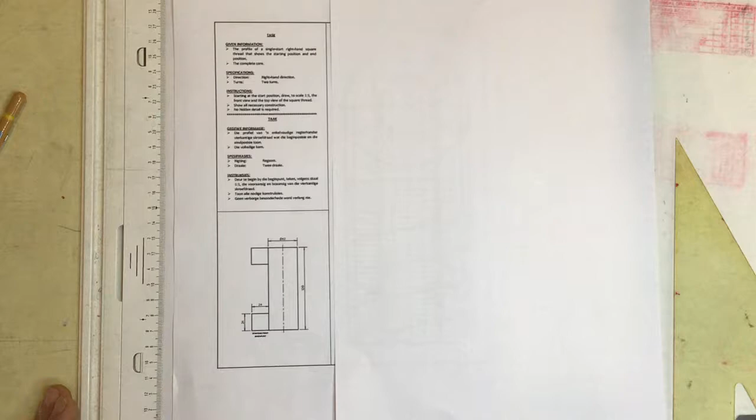Okay, in this video we're going to look at the drawing of a square screw thread. It says that the given information is a profile of a single start right-hand square thread that shows the starting position and the end position. The complete core, they've also shown that. They ask you to do a right-hand direction, and they've asked for 2 turns. Very important, that 2 turn story.

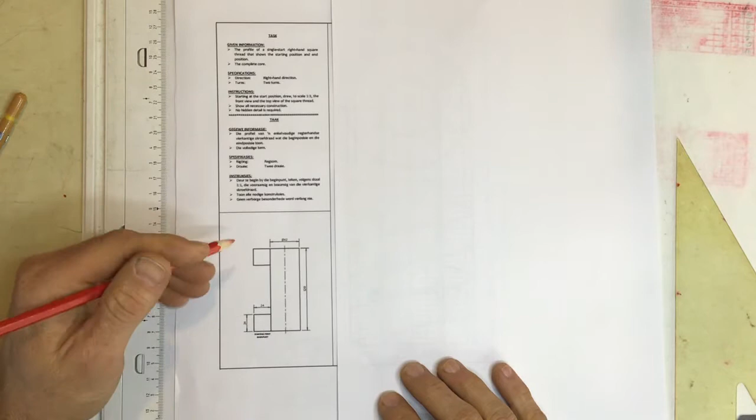They say that the starting point, draw a scale 1:1 and a front view and top view of the square screw thread. Show the necessary construction and no hidden details required. Okay, they've shown the actual profile of the square screw thread, which you shouldn't actually ever be able to see when you're doing these drawings because, well, in real life you'll never really see the square profile of that square screw thread. It always has a starting position.

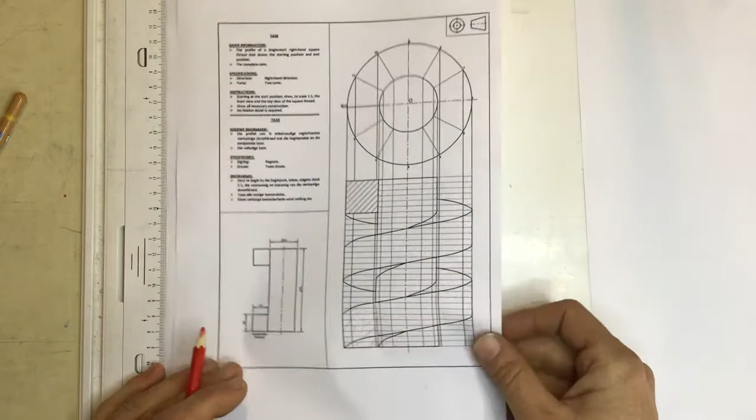I'm going to show you what their answer was. They've actually shown the square profile of the square over there, and they've also shown that, well, if I had hidden detail over here, I'd be able to see a square profile down at the bottom there as well. The answer shouldn't really look like that. Your answer should look more like this, where you can see the start of the screw thread basically being like a wedge, you could say, and the end also being a wedge. And that's more what we're going to aim at with this drawing.

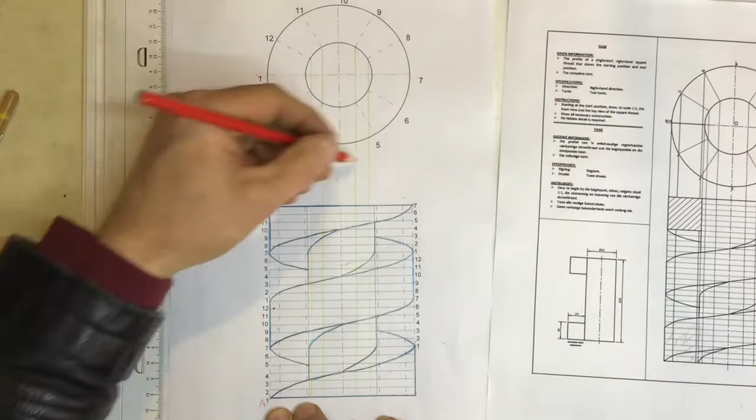Right. They've asked you to do a right-hand direction, okay? And we're going to say that our starting point A is down at the bottom over here. There's starting point A at the bottom and starting at point 1. If my starting point is at the bottom, my numbering is going to go anti-clockwise for a right-hand square screw thread, okay, or right-hand helix, going anti-clockwise if the starting point is at the bottom and it's right-handed.

Okay, let's have a look at the numbering over here. When you're numbering from the bottom over there, remember we said that our start was at the bottom, 1, 2, 3, 4, 5, 6, 7, 8, 9, 10, 11, 12, going back to 1, okay? A lot of the textbooks, they go 0 to 12, and then they have another 0 to 12. I prefer just to start with 1 and end with 1.

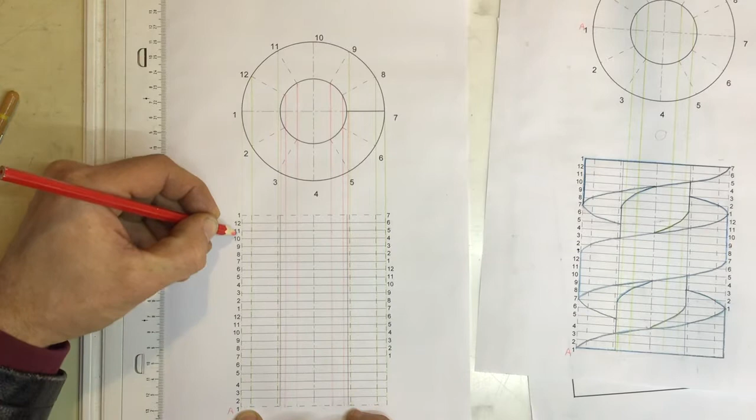So I've still got my 12 spaces, 1 through 12 and back to 1, that's 12 spaces. 2 through 12 and 1, that's still 12 spaces again. Okay, right, let's just have a look and see where we're standing in this.

If I'm looking at a third angle orthographic projection, I'm standing in between the 2 views, which means that I can see these numbers 1, 2, 3, 4, 5, 6, 7, and I'm going to come to my drawing over here and I'm going to draw that number 1, 2, 3, 4, 5, 6, 7. Starting at 1, there's 1 linking up with that 1, there's 2 linking up with 2, there's 3 linking up with 3, and we're just going to continue.

There's 1 to 2, 2 to 3, 3 to 4, 4 to 5, 5 to 6, and 6 to 7. You can see it over there. 1, 2, 3, 4, 5, 6, 7.

Okay. Once I've got that, I'm going to then start with another set of numbers over here. Can you see this number 1 through 12, going back to 1, okay? I'm going to be able to see the top of the next screw thread over here, starting at number 1. There's number 1, linking up with number 1. So 1, linking up with 1, going to 2, 3, 4, 5, 6, and going to 7.

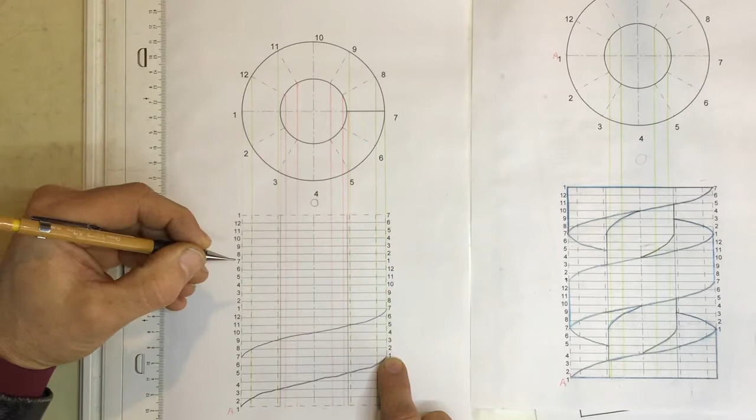Right, once I've got that, well, I come back over here. This is my second turn. Okay, number 1, going to 2, 3, 4, 5, 6, 7. Okay, there's number 1 over there, starting with point number 1. 1 to 2, 2 to 3, 3 to 4, 4 to 5, 5 to 6, and 6 to 7. All right.

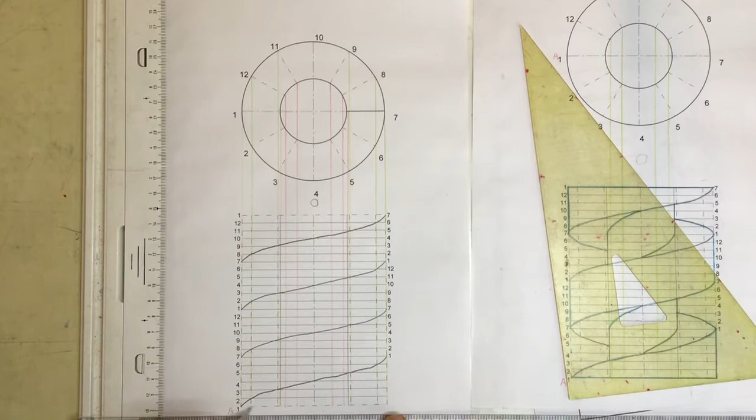Once I've got that, my next step that I always say is so important because it helps you to start recognizing what you're dealing with. That was the start of the screw thread. It's got a flat bottom over here. Draw that in. And come along here to this edge over here and draw that in. If that's the bottom of the screw thread, and this is the top of the screw thread, you can see that.

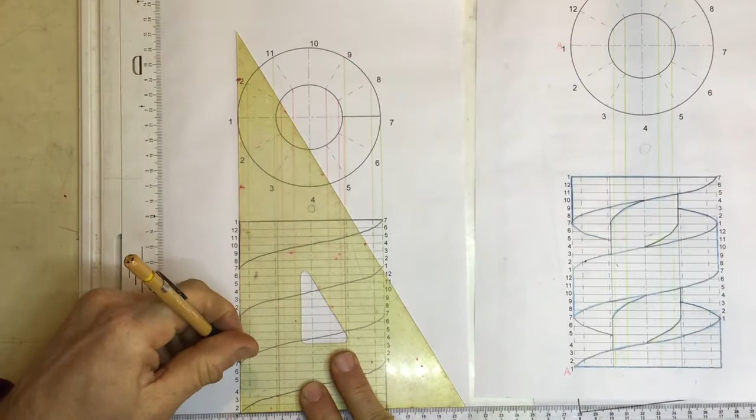Well, there needs to be a gap in between, so this is the edge of the sort of middle part of that story. And you can already see the little gaps. I'm just going to bring the answer across here. You can see that gap over there, that gap over there, that gap over there, and that gap over there.

Do that to start with, so you get the stuff that you can see, all the 1 to 7, 1 to 7, 1 to 7, 1 to 7. All right, that's all the stuff that I can see. And from there, I can start looking at, well, what is it that I can see of the stuff that's going to start on the core. All right.

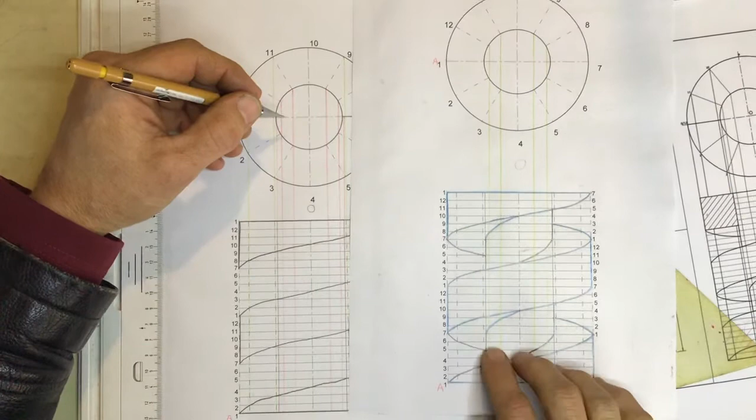I would start over here and I would say, all right, on the core, I've still got a number 1, 2, 3, 4, 5, 6. Oh, what have I done? There's number 4, number 5, 6, 7. I thought there was a mistake there. 8 over there, 9, 10, 11, and 12. You can see those points on the core.

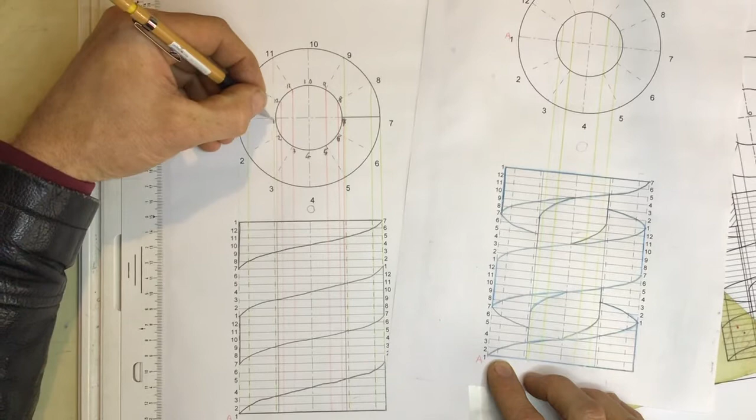I normally don't write them in over there. I just use the numbers coming off the edge. I can see exactly where they are. Number 1 on the core would be down here. Now, I can't see that because it's behind this solid piece of material over here. So I would have hidden detail going 1, 2, 3, going up to 4. There'd be hidden detail over there, but they haven't asked for hidden detail.

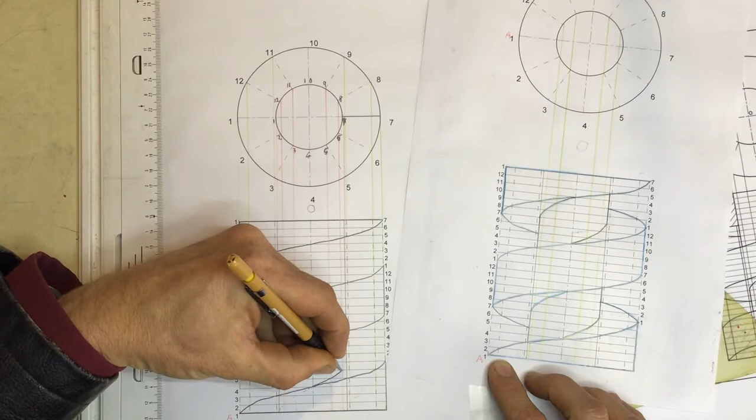But over here, I will be able to see from 4, 5, 6, and 7 coming out over here. So from there, 4, going to 5, going to 6, and going to 7. All right, there it is. 4, 5, 6, and 7. Linking up with those numbers over here, 4, 5, 6, and 7 on the core. Just that little piece over there.

I come up over here, and I'm going to have exactly the same thing happening on the top of this thread over here. There's number 4, going to 5, going to 6, going to 7. Let's draw that in. 4, 5, 6, and 7. I can see that little piece of the thread going in there. And see that little bit of thread against the core.

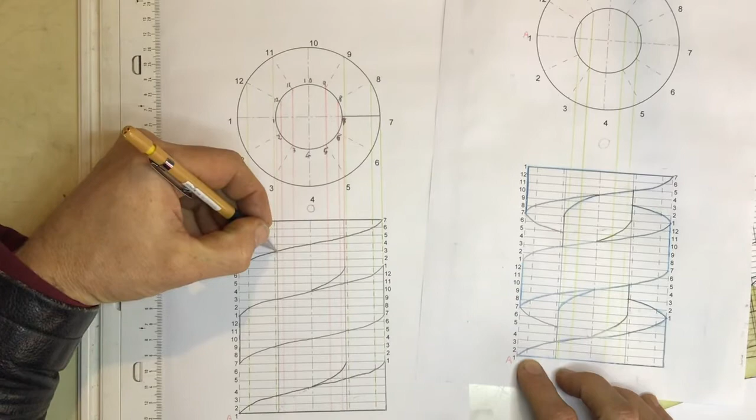And then on the top part of this thing, I'm going to be able to see a little piece of thread, which would be number 4, 3, 2, and 1. If you look at this, there's number 1 linked up over there. 1, 2, 3, 4. Note the 1, the 2, the 3, and the 4. Okay, and I can do the same thing over here. There's number 1, 2, 3, and 4.

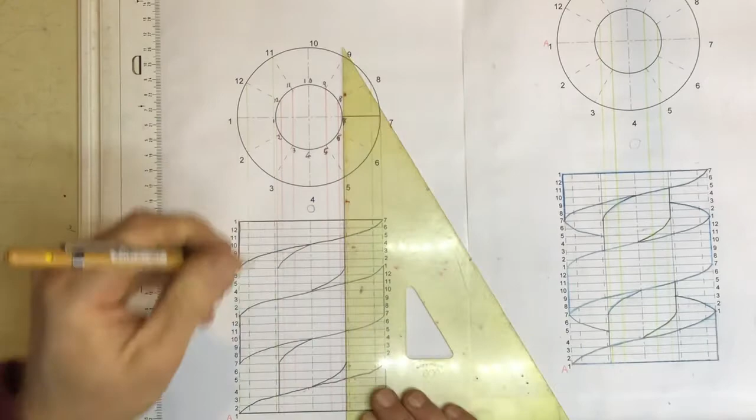Right, once I've got that in place, I can then say, well, I've definitely got my core in place. I can draw a little dark line going over there, and a dark line going over there, and a dark line going down there, and a dark line going down there. Once I've got that in place, you can see that I'm missing a little bit of detail over here for this back piece over here.

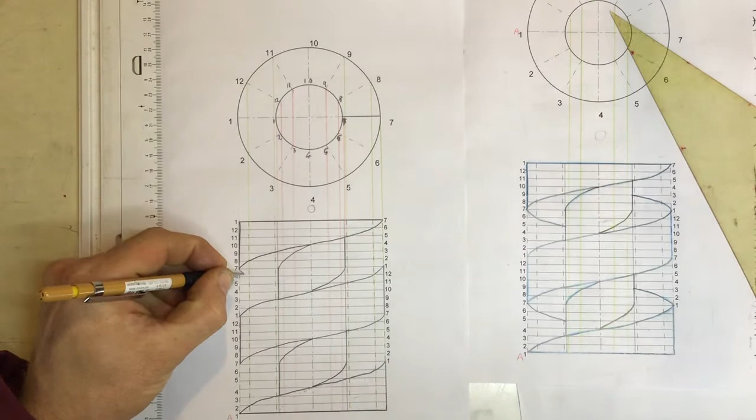There is going to be a little piece that you can see looking through this thing, going from 7 down to 6, down to 5, going to 4, but then it would be hidden detail going across there and I wouldn't be able to see any more of it. Same story over here, 7, 6, 5, going to 4. Okay, let's just draw that in a bit darker. There it is.

Okay, and over here I would be able to see this little part, where it goes from 7 to 8, 9, going off to 10, but it would be hidden detail going off over there. 7, 8, 9, going off to 10 over there. And once you've done that, you have completed your square screw thread.

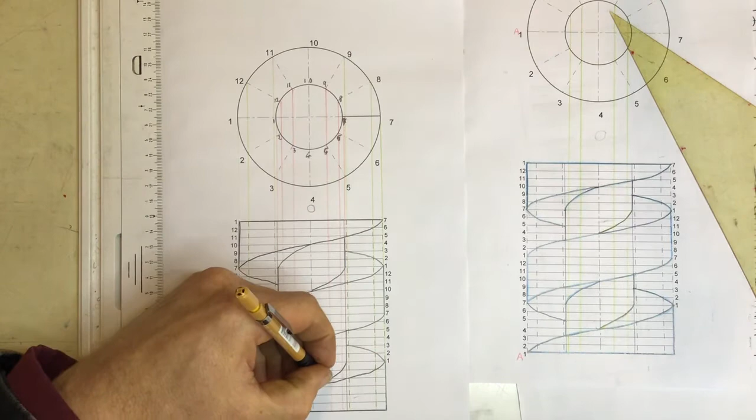Always place yourself in the picture, see what numbers you can see. Remember, you need to do the outside of the thread and you need to look at the core as well. Look at what numbers you're going to be able to see. Like over here, that would not be seen because I can't see the core part. It is covered over by the outside of the thread. Over here, I can see the core part because the thread is out of the way. Right, I hope that helped.